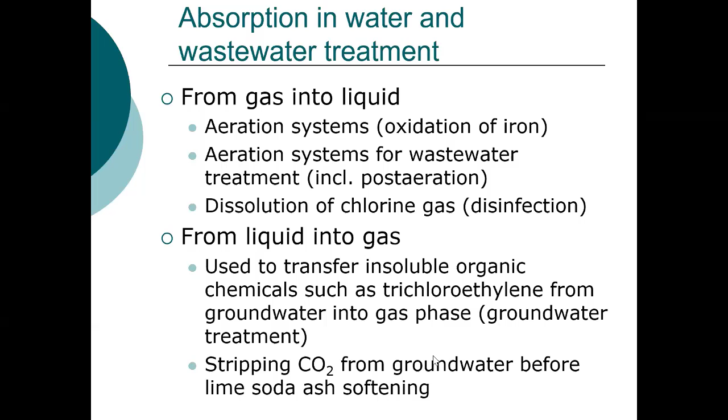We can think about this in terms of oxygen. So we have oxygen in a gas stream, and that oxygen can be transferred across the air-water interface, so we have oxygen in an aqueous stream. In all cases, what we're looking at is transfer across this air-water interface.

The rate of transfer is a function of the temperature. We'll write it in terms of oxygen, but the partial pressure of oxygen, or the partial pressure of gas, the concentration of the oxygen in the aqueous stream, the mixing efficiency, and the composition of the water.

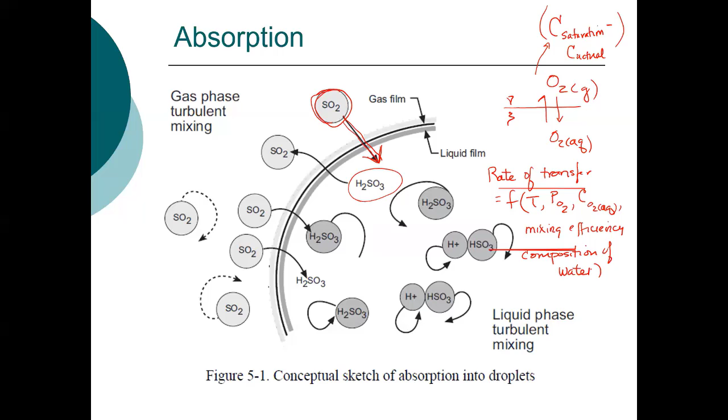So think about the Red Cedar upstream of the rapids, or downstream of the rapids. Where would you expect higher concentrations of oxygen in the water? Downstream. Why? More mixing. Exactly, turbulence. More turbulence, more mixing. Because you've got more turbulence and more mixing, that increases your transfer efficiency.

So in terms of absorption efficiency, or really mass transfer efficiency, in an engineered system the ratio of the flow rate of the liquid to the gas will affect efficiency, and we'll look a little bit at this. The solubility of the gas plays a significant role, as we talked about with the effect of temperature on oxygen solubility. Contact also matters, as we discussed with the oxygen levels in the Red Cedar upstream versus downstream of the rapids. And the other factor is the composition of the water or wastewater.

What you'll find, for instance, is that for any mass transfer unit, the mass transfer efficiencies are actually determined using pure water, not wastewater. But what you'll find is that the transfer efficiency decreases when you move from water to wastewater. The efficiency is actually less.

We didn't talk about designing aeration systems. I believe that's covered in ENE 804. So for any of you in the BSMS program who will take 804, you'll learn about that there. Or if you plan to go to grad school in environmental engineering, you will have a course in biological treatment where it's covered.

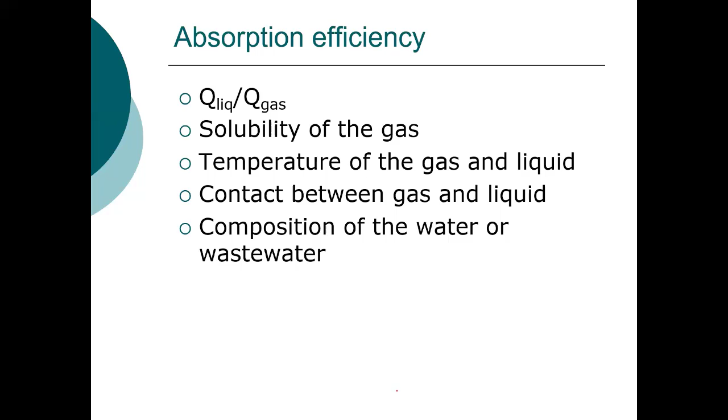So, reiterating some of this, we can use air stripping to transfer volatile components from a liquid stream to a gas stream. Typically we're looking at, for instance, a groundwater remediation project where you have BTEX, trichloroethylene, tetrachloroethylene - chemicals that are sparingly soluble and have a high Henry's law constant.

Ammonia is another chemical that can be removed. This is pH dependent - what you're removing is ammonia, not the ammonium ion. The pKa is about 9, so if you're looking at removing ammonia by air stripping, you would have to increase the pH above 9 so the ammonia is in the form of ammonia, not ammonium ion, and then it could be stripped. Typically these systems are more effective at warmer temperatures. That's not true for oxygen, but it is true for removing these volatile components from a liquid stream, like groundwater.

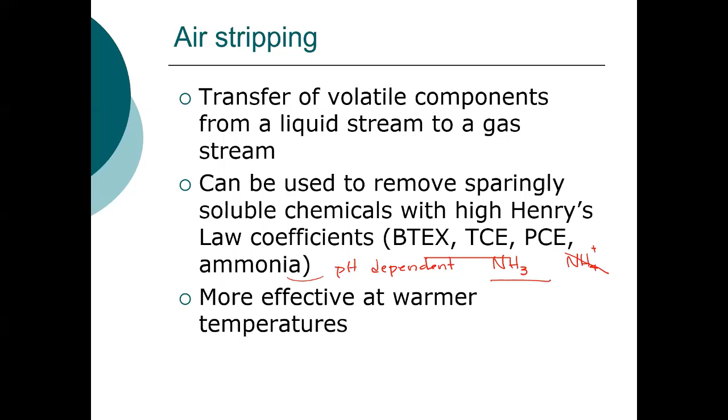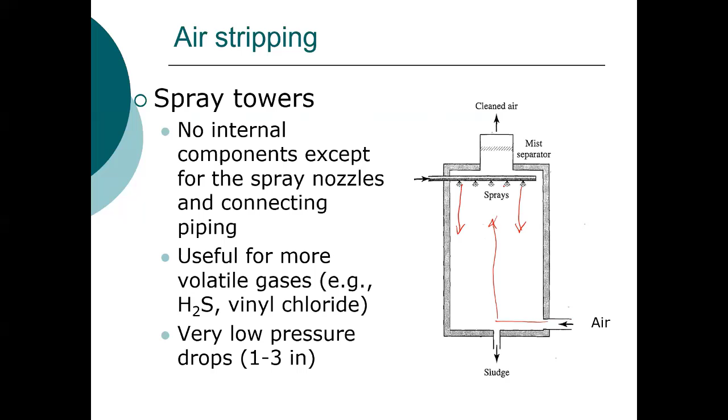There are a number of types of units we can use. We can use spray towers, which have no internal components except spray nozzles and connecting piping. These can be used for volatile gases, for instance hydrogen sulfide or vinyl chloride. They can be used for CO2 stripping from groundwater before lime soda ash softening. Notice these are typically countercurrent systems - air flows from the bottom upward, while the liquid stream flows down. These have very low pressure drops, so they can be used for very volatile chemicals.

Tray towers are useful for chemicals that are not quite as volatile as vinyl chloride or hydrogen sulfide. They provide good contact - you have trays, and water typically flows from the bottom up and out the top, or rather water typically flows downward, so you're pumping water up and then allowing it to flow down. These systems are reliable and used for CO2 stripping in groundwater systems, removal of chlorinated solvents from groundwater, and BTEX removal, etc.

The equation I gave you here is actually provided in the FE handbook. It simply says that the concentration leaving in your water, Cn where N is the number of trays, is equal to C0 times 10 to the minus K, a coefficient provided by the manufacturer, typically ranging from about 0.12 to 0.16 for CO2 - it's specific to the contaminant - times the number of trays. This can also be used to determine the number of trays needed for a tray tower.

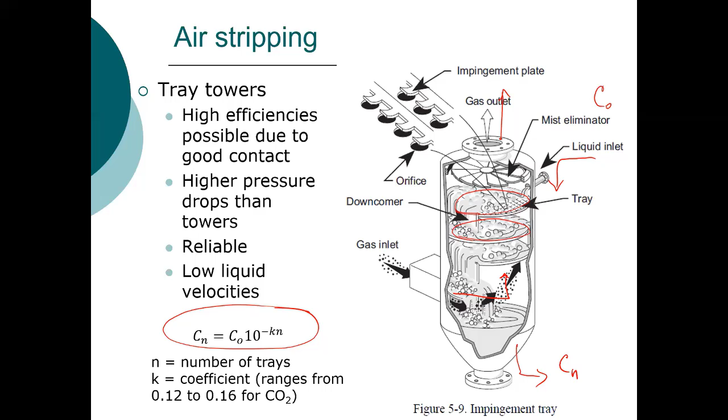That term is typically not used in water treatment or wastewater treatment, but it is common in gas treatment. In part, that's because when we're looking at gas treatment, you're also achieving some particulate removal. That's not the case in water treatment.

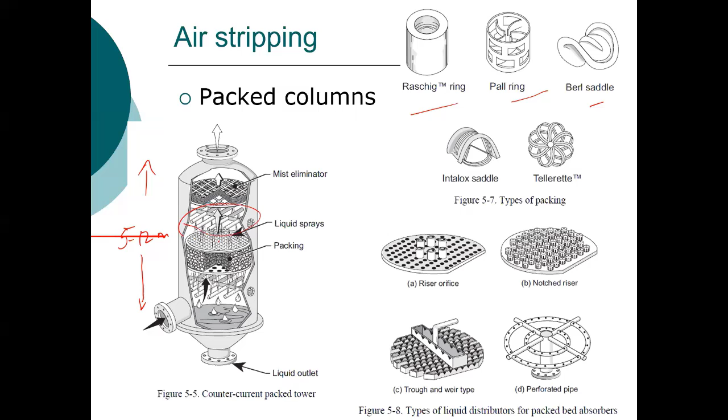Height is typically about 5 to 12 meters, so they're quite tall. When they're that tall, they tend to be permanent, or they can be mounted on mobile units. Again, typically you have a countercurrent flow with the liquid. You can see the liquid here, so the liquid flows down and your gas stream flows up.

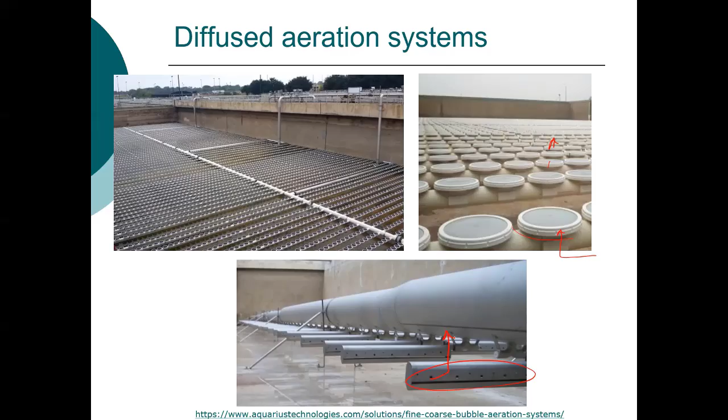You can also use mechanical aerators. These are shown in ponds. These can be used in lagoons for treatment. You're using some sort of mechanical aeration in order to impart or add that oxygen into the water.

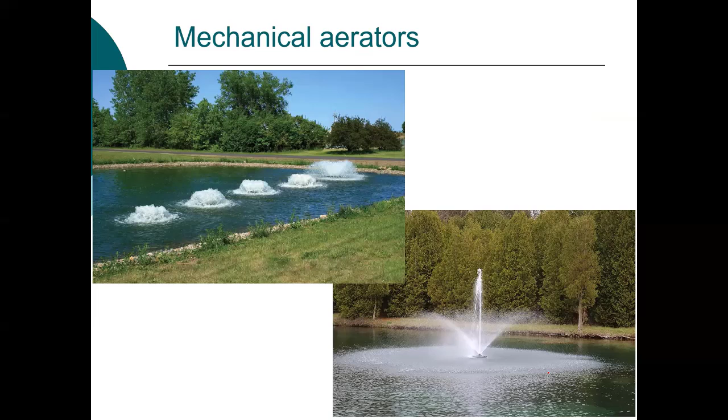These are cascade aerators. The one on the left is actually a photo that Craig Tatara had sent from the Genoa Osceola plant. You can see the water's just cascading down this stream, and as it does, it's adding oxygen. And there's another picture on the right.

Any questions about any of these types of systems that we use to transfer either a chemical from the water to an airstream or from the airstream to the water?

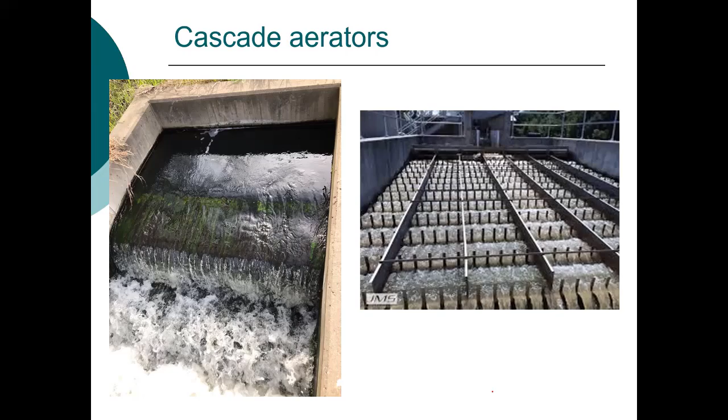So looking at this process of mass transfer, what we have in all cases is, in this case shown here with a chemical in the bulk gas phase—this could be oxygen—we need to transfer that chemical to the air-water interface. Typically, we would have a stagnant gas film on the gas side. It has to cross this interface. We have a stagnant water film that's actually thicker, quite a bit thicker than the gas film. And then it has to move out into the bulk liquid.

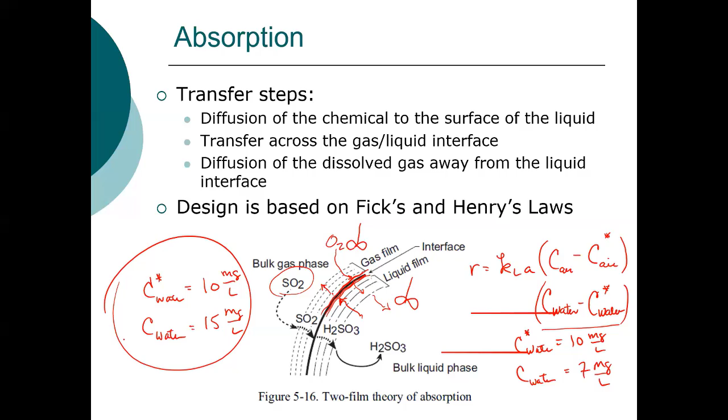We model this in a column using the same approach we've used all semester. We'll assume that the mass in is equal to the mass out. So if we're looking at any chemical—oxygen, BTEX, benzene, toluene, xylene, ethylbenzene, whatever—we have mass in the water.

We have mass in from the air. Notice I've drawn this as a countercurrent system. Then we have mass out in the water and mass out in the air, and we can write a mass balance as we've done here.

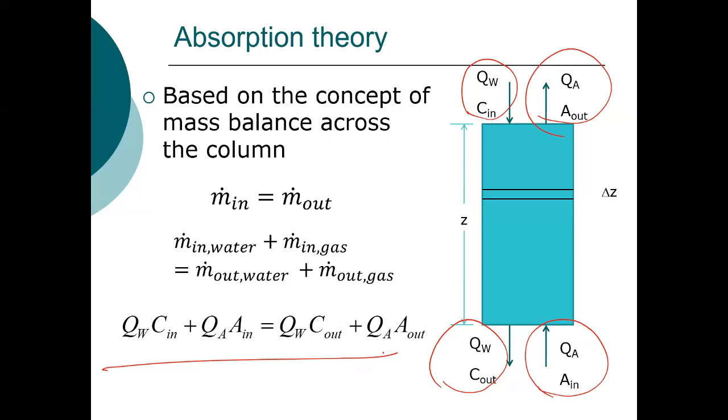Now we'll make some assumptions. We're going to assume that within a small volume, delta Z, my solution is completely mixed. So within that very small incremental volume, we have complete mixing.

We'll assume we have a dilute solution so that we can use Henry's law, which simply states that the partial pressure of a gas is equal to Henry's constant times the concentration in the aqueous system.

This is at equilibrium. Be careful with Henry's law—it can be written in this way, or it can also be written with the inverse. So in this case, it's PG over C aqueous equals the Henry's constant, and it can be written as the inverse. So you really need to know what your units are for your Henry's constant.

We'll also assume that we have no changes in the volume of the air and the water—the transfer of these chemicals doesn't change the volumes. We'll assume we have no accumulation in the reactor, and we have no reaction. Because we have no change in volume, our flow rates are also constant, so we can assume that flow in for water equals flow out, same for air.

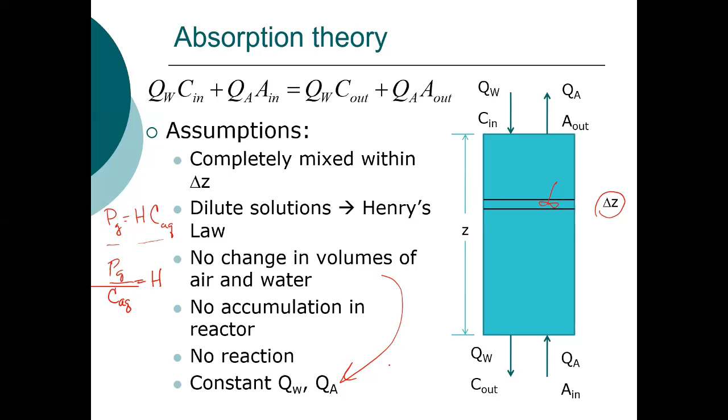So again, this is just another example showing what we're looking at: the transfer of a chemical across this air-water interface. I'm going to skip over this because I've already done the example problems I was going to do here.

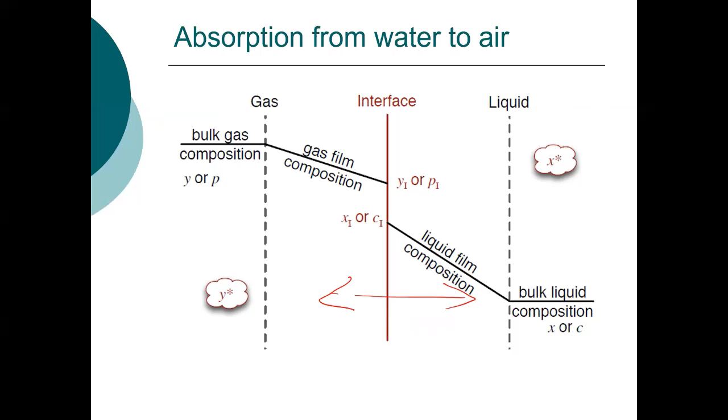So for the transfer, in this case, this is written for the transfer from water to air. In 489 we'll look at the equations for the transfer from gas to water, but in this case I'm only going to give you the equation for the transfer from water to air.

So the packing height is Z, and this is for a packed tower. This is the same equation we used for adsorption. So we have the height of the transfer unit and the number of transfer units—the definitions are identical to what we used previously.

So the number of transfer units, in this case—and this is the equation provided on the FE exam—is equal to the stripping factor. Notice your stripping factor is equal to a dimensionless Henry's constant. So that's your Henry's constant, where R is in atmospheres, liters, moles, degrees Kelvin.

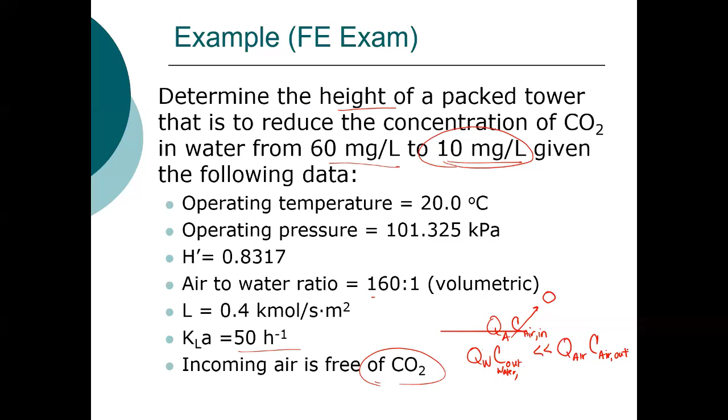We're going to assume that the incoming air is free of CO2. We know that's not the case, but the equation we're using also assumes that Q sub A times C air in is equal to 0. We're also assuming, because we're transferring it from the water to air, that the mass of CO2 leaving in the water is significantly less than the mass leaving in the air. So we're assuming a significant transfer from the water to the air. Those two assumptions are actually made in deriving this equation.

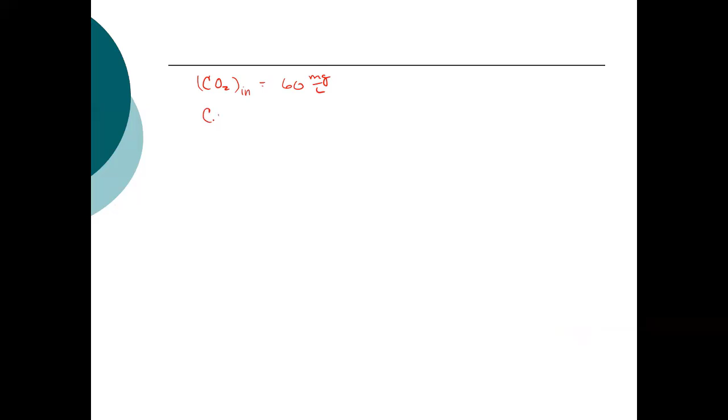So CO2 in is equal to 60 milligrams per liter, CO2 out is equal to 10 milligrams per liter. Our dimensionless Henry's constant is 0.8317.

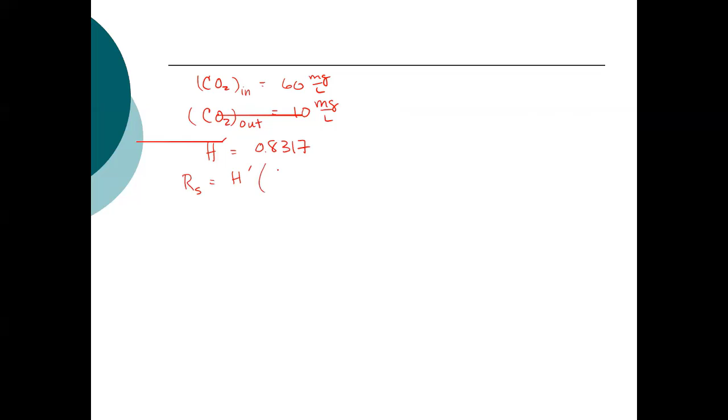Our stripping factor is equal to the dimensionless Henry's constant times the ratio, the volumetric ratio in the air to the volumetric ratio in the water. That is equal to 0.8317 times 160, and that 160 was given, and that equals 133.

So the number of transfer units is equal to 133 divided by 133 minus 1, ln - notice the greater this value is, the closer it is to 1 - and this is equal to ln of 60 over 10, times 133 minus 1, plus 1, over 133. And this is equal to 1.8. So the number of transfer units is 1.8.

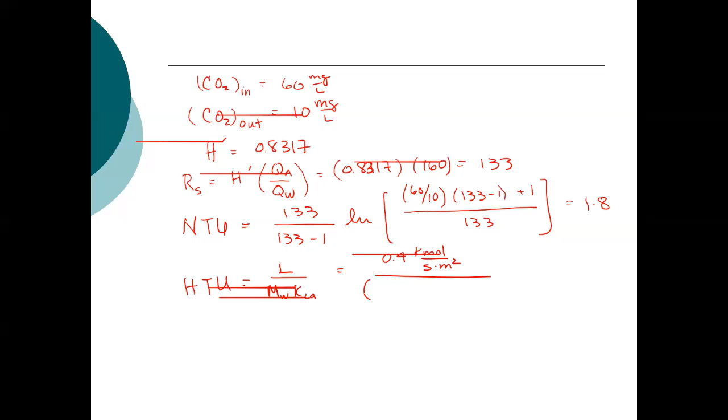The height of the transfer unit is equal to L over MW KLA, and that is equal to 0.4 kilomoles per second per meter squared - I apologize for these lines, I've figured out they're a factor of PowerPoint because it doesn't happen when I'm using PDF - the molar density of water is 55.6 kilomoles per meter cubed of water. The KLA is 50 inverse hours, and we have 3,600 seconds per hour. So this is equal to 0.52.

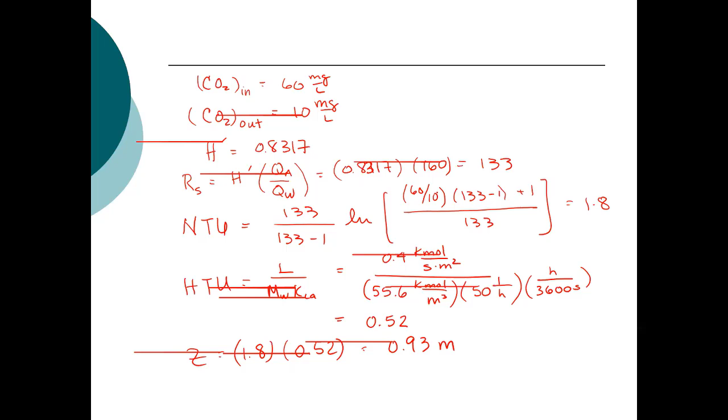So Z is equal to 1.8 times 0.52, or 0.93 meters. So it's roughly a 3 foot column that we would need. If we were to decrease that concentration, let's say to 5, that's going to increase the number of transfer units. It's not going to change the height of the transfer unit, but it changes the number of transfer units, so that will increase the height. The height of the transfer unit is dependent on my mass transfer coefficient.

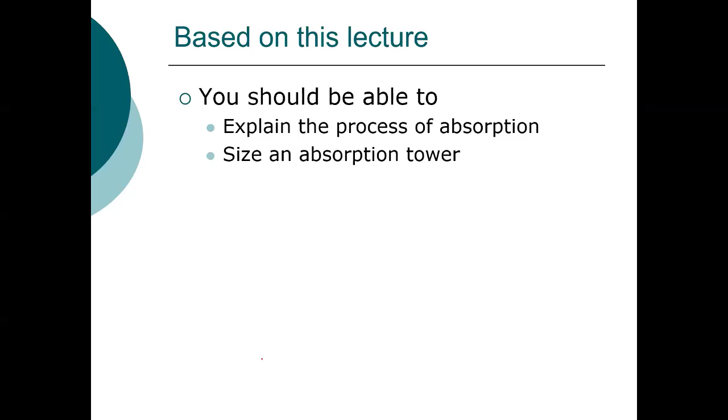So we'll end there. Hopefully you understand a little more about absorption or air stripping, and you can size an absorption packed tower. And I'll just end with the reminders.